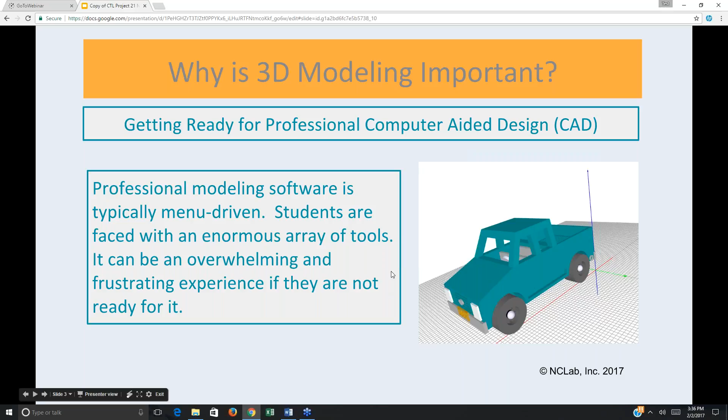This little picture on the side here is a model that was built by one of our students using our software. So you can see that you can build some pretty sophisticated models.

So they're going to be more successful if they get that visual spatial reasoning underlying what they need to do in the programs. And that involves learning how to move, rotate, scale objects, subtract objects, and other essential solid geometry skills. And you'll see what I mean here in a moment. And also how to build complex designs from simple ones.

So here's some examples. This is a shape, a teepee that's built actually from a cone by changing the cone characteristics. Here's a DNA model that's built using a simple set of bars and then running them up a spiral. And over here is a three-dimensional Tetris, which is quite fun to work with, but boy, that really stretches your understanding of rotation and movement when you try and fit the pieces together.

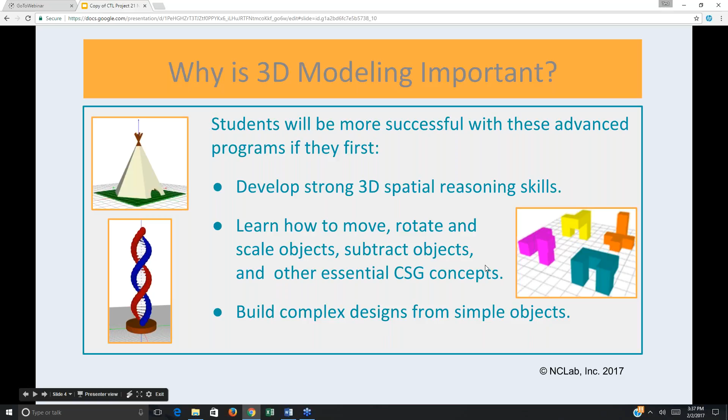All right, so the other main reason why we're doing this is jobs. You think of the companies that are moving into Nevada, they want their technicians to have a solid foundation in these skills. So here's some examples. Manufacturing. You might be building a prototype or you might be on the production line, but you're going to be using those skills either way.

If you go into entertainment, animation is a huge component of entertainment. Think of all the movies you've watched recently, whether they're realistic or cartoons. They use computer graphics. This is also used to train people. It's used in sales. It's used in forensics to model what might have happened.

And then if we look at science, we model things all the time, whether it's a molecule to a large-scale model of the universe. In engineering, we build models and test them. And this is something that you can do even in a simple software like ours. You can build a model and test limits on it. Architecture is definitely built up of simple geometric components.

Think about operating drones in 3D space. You're moving them in different directions, up, down, tilting them, rotating them, and so forth. Art, very definitely, when you're building models, especially in production art, you're going to be using some of these manufacturing components, but you also might want to design on your tablet something that you're going to build manually. So this could be used in sculpture, pottery, or painting.

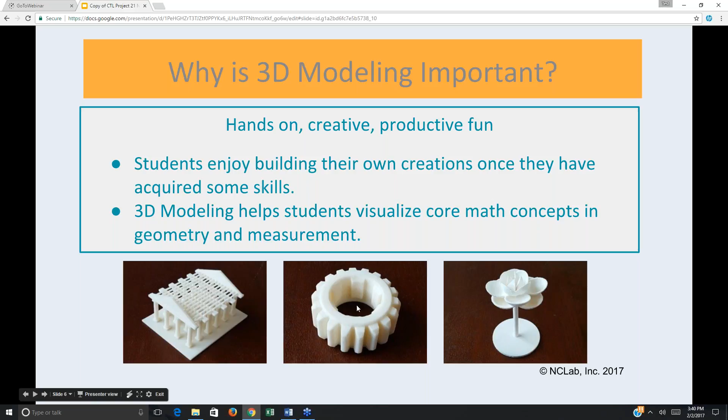All right, so last time we looked at Karel, and the screen for 3D modeling is very similar. You're typing code on the left-hand side, and then when you run it, you produce a model on the right-hand side. So you get instant feedback for anything that you script. The script builds language, it builds logic, it's writing and math, and the model on the right, that's what the results are going to look like.

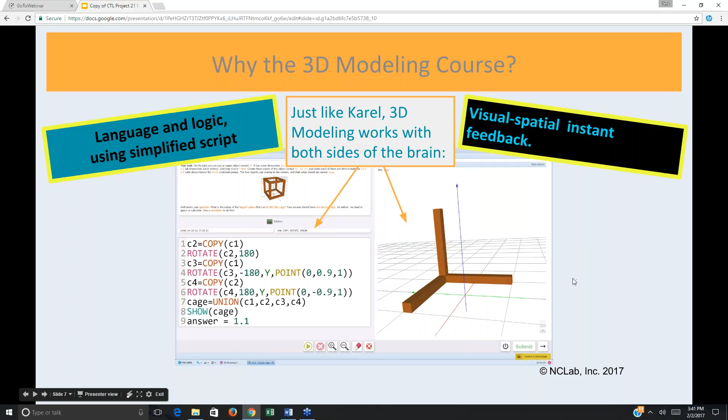So you're working with multiple areas in the brain, both sides if you like to use those terms. And this is powerful for building all these senses that we want in our kids, their math senses and their visual spatial senses. So why do we use script to build models? We could just go to that drag and drop menu. Well, there's several reasons. It's surprisingly easy to write, read, and edit.

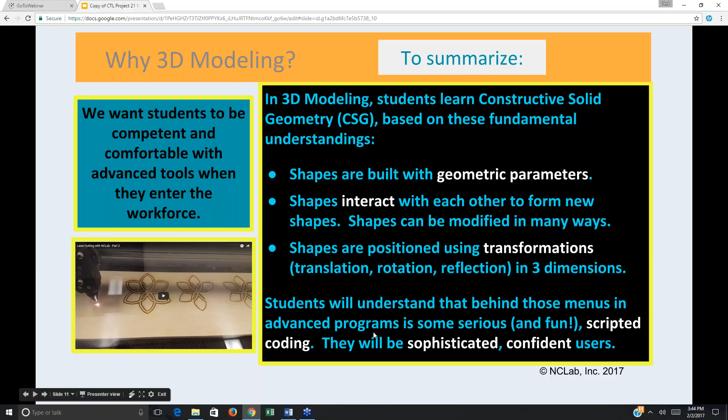This is really going to help students understand these basic geometric concepts, and they'll understand that even when they use those menu-driven programs, there's some pretty serious scripted coding underneath. This will make them confident and pretty sophisticated.

By the end of the unit, they're going to be able to script many different 2D shapes, move them in the XY plane—that's 2 dimensions—subtract and combine them to form complex composite models, and then extrude them to 3D. Extrude is a very simple command; it just makes a plate out of the design, so they can even start printing any of these objects right from the beginning.

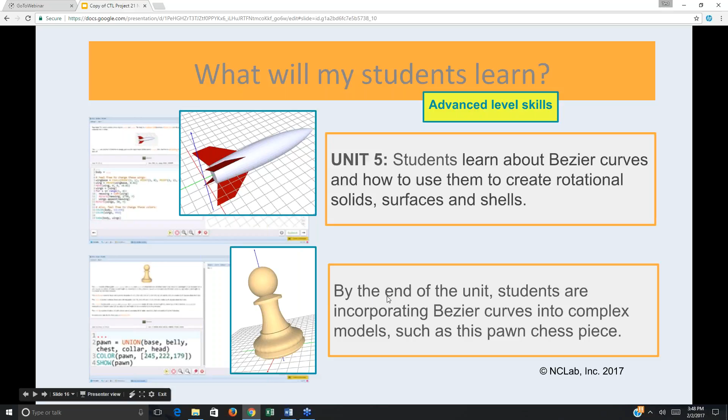And that's the course in a nutshell. All right, so how are they going to learn this? Well...

Self-paced and self-graded means just that—you can use the course just by itself. There's always some form of context to give them ideas of where they could apply their skills. Every section has step-by-step videos showing them how to do it. There are a series of instructional screens that build the understanding of what they're doing. There are demonstration levels where they might just run it or just add a simple piece of code—mostly done for them to see how it works.

The sections are all scaffolded, so they start with something simple and build to more complex, also starting with a lot of the code written and moving towards the students writing the code for themselves.

There's a feature called the code template, which is a button. If they get really stuck, they can hit that button and it'll supply most of the code so they can fill in the blanks. You can see from your teacher view which students have used this and which have not.

There's a drop-down help menu, which is a list of commands and has a textbook and videos that they can access at any time. We're going to look at this in a moment. When they submit a level, they'll always see how they did and get some feedback. This is something that should go live in a week or so.

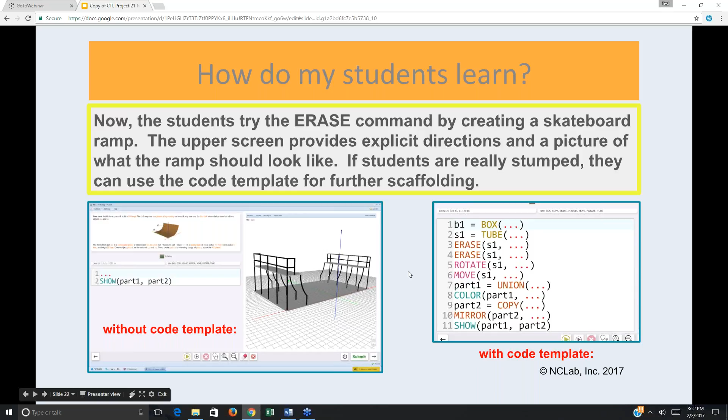If they have trouble with that, even with all that guidance from the top screen, they can use the code template, which is the red button at the bottom, and it'll pop up so it becomes fill in the blanks. That's going to help your students who are maybe not very confident or struggling for some reason—they can use the code template.

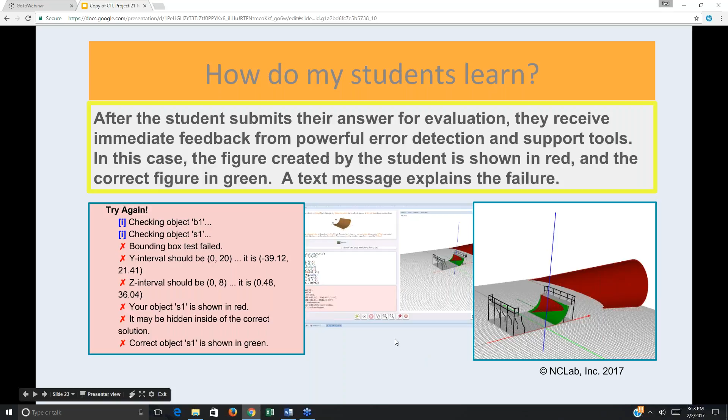So this is how the course is built. They're learning one level at a time. Right now the 3D modeling course is divided into 5 units. Units 1 to 4 have 5 sections, and you can think of a section as a concept arc. Each section has 7 instructional levels, then a quiz level, and a project level. Project is where they can design their own set of objects based on what they've learned, giving you a performance task you can evaluate for grades.

The levels each represent one step of instruction or practice within the concept arc. By the end of 7 levels, hopefully they've got it. This is systematic instruction, practice with a gradual release, and there's 234 levels in all, so it's very gradual.

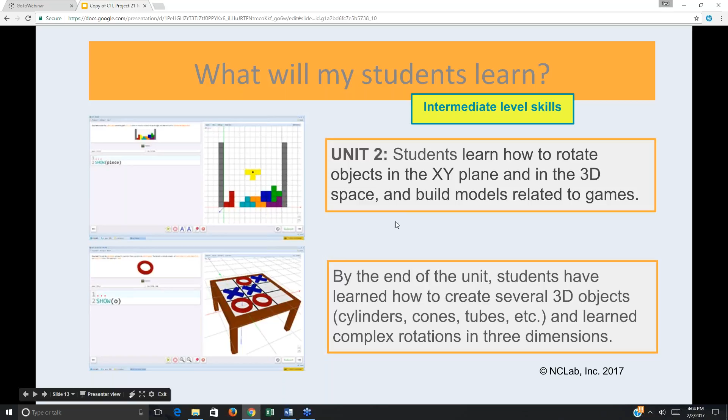So, yes, you could make this fill a full semester, especially if you add student journals and other activities, maybe a group project, or maybe have them apply it to a STEM subject area.

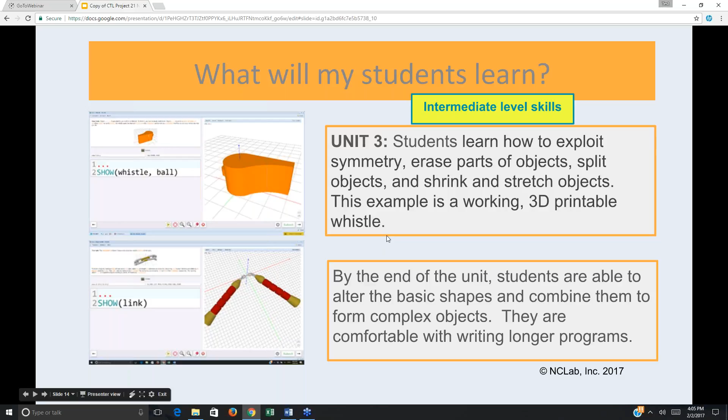That's good. Yeah, and yes, some of this stuff is pretty advanced, but it depends on what skills they're coming in with. I think as our students grow, they'll have had a little more experience with, say, basic coding, and then the coding's not so intimidating. Yes.

Yeah, and so sorry, I'll just finish off that. If you have a high level student, that's great. Have them build stuff. They will be entertained for hours and hours and hours because building, the sky is the limit. Okay. No, you said it exactly.

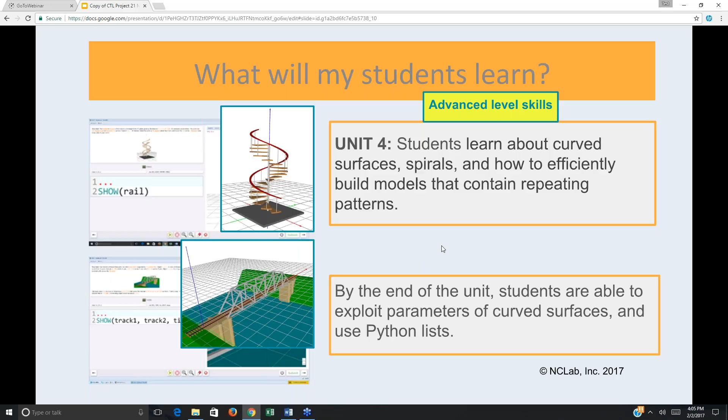The question I had was, in the teachers seeing where the student's at, does that keep track of how long they've actually been on the site or coding? I didn't check that. Not in 3D. We do show in Karel and Tina, it shows how long they've spent on each level. But right now on 3D, it just shows that they've completed it and how many points they got.

Another question came: say a couple students have an issue and you want to do a class on it, the source material for the teacher to do that, where would they find that?

Okay, this hasn't been published yet, but we should have it ready for the March 4th training. We're completely redoing the lesson plans so that they're a little easier to use. Each section has a 2-page lesson plan layout, and it includes all the links to the videos. It will include a link to a slideshow, so the slideshow could be thrown up on a smart board and gone through the steps.

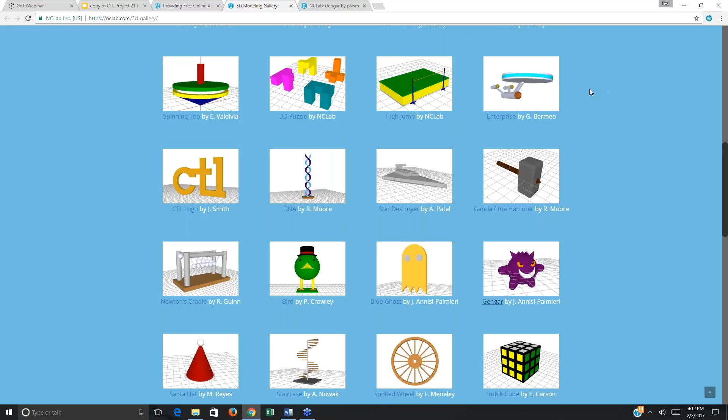And boy, some of those struggling students, when they got it, they were so proud to be a mentor for someone else. So it isn't always the same old kids who are mentors for each concept area. But yes, and this is something I think that would encourage the students, to look at some of these drawings and see how they're built with code. And yep, they can build anything they want, and the files stay with them even when they aren't in the course anymore, and it's theirs forever.